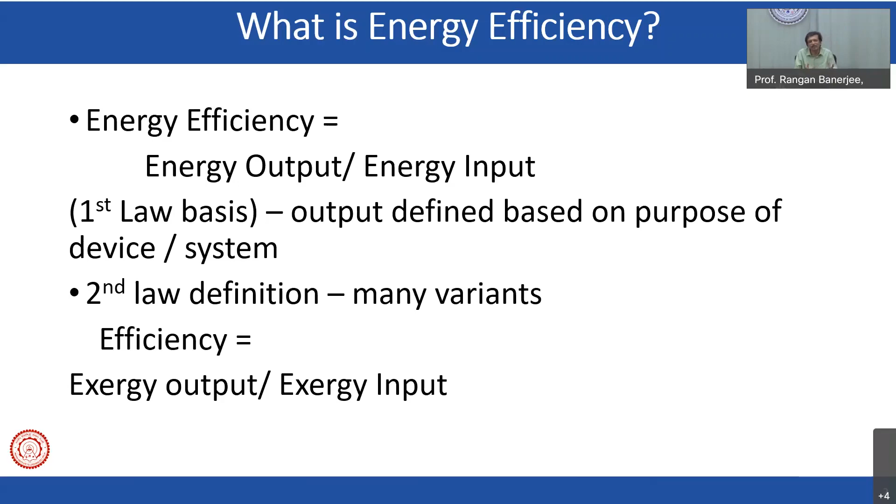So just to give you one of the first practical examples—this is way back, we're talking of the steam engine and the first efficiency measurements, around the 1800s. This is from a paper, and we'll give you the reference. It looks at the water being expelled from the engine, the total output coming out, and this was used to define an efficiency and to compare different kinds of designs.

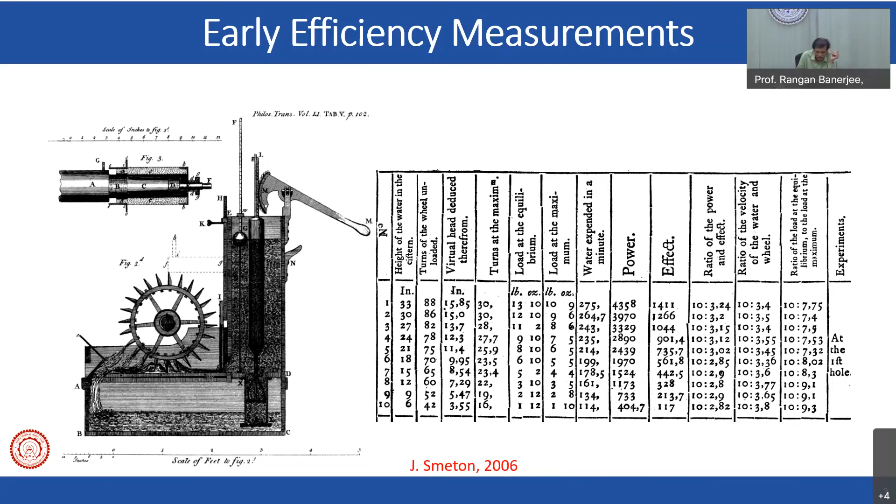We also had an energy service company—the first concept of the energy service company was actually established way back by James Watt. James Watt was a very nice innovator, but he was also a very good businessman. He started off saying, we will leave you a steam engine free of charge. This was a time when you were competing against horses, since earlier it was horsepower we talked of. He said, we will install these and take over the operation for 5 years as customer service. We will guarantee that the coal for the machine costs less than you spend as fodder on the horses that do the same amount of work—for lifting water and everything you require—and you give us a third of the money you save. It's very interesting. He also had certain patents, and there was this Watt and Boulton partnership. So this shows that the energy service concept, the ESCO concept, is also not really new—it started off initially this way.

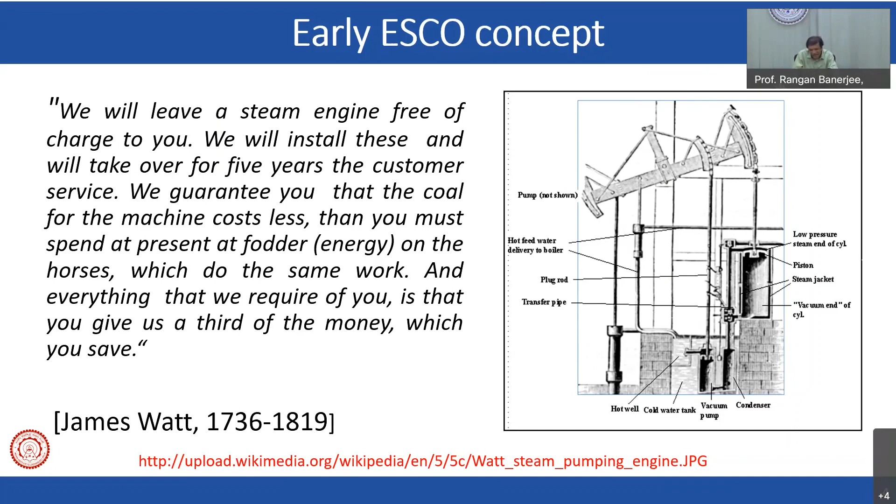Now here's something you may want to think about, something I'm sure all of you have heard as slogans: is a unit of energy saved equal to a unit of energy generated, or is a unit of energy saved more than a unit of energy generated, or less than a unit of energy generated?

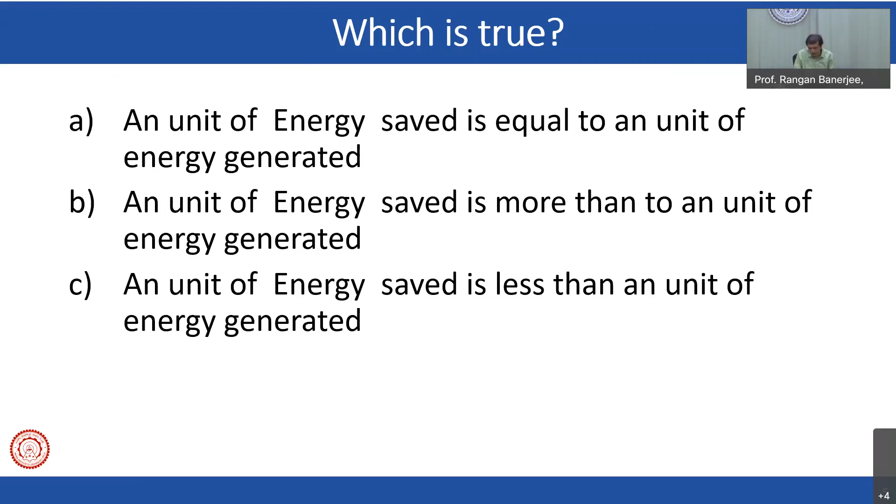Now, most of the energy professionals on this platform will say that it is usually more than a unit of energy generated, and I'll explain why. And then this is something that all of us have seen. Basically, whenever we talk about energy, today what you're seeing is in your rooms which are air conditioned, or in the display that we are seeing, there is finally an illumination, there's a comfort, there is a final end use that we are looking at, the end use activity.

But in order to have that end use activity, we are using the energy that is available in nature. That primary energy earlier used to be mainly fossil, coal, oil, natural gas, and now we are talking of solar, we are talking of wind. This primary energy in the form that it's available in nature is not really directly useful to us. So it goes through a sequence of conversion steps. So in case of coal, you mine it, you wash it, you put it into a power plant facility, you generate electricity, you have the secondary energy.

That secondary energy goes through a transmission and distribution system. You have the final energy that you buy in your CII center. If you're buying it from some discom, you then use it within your building to run your air conditioning system, or you use it for your compressed air, so you get the useful energy which gives you the end use service.

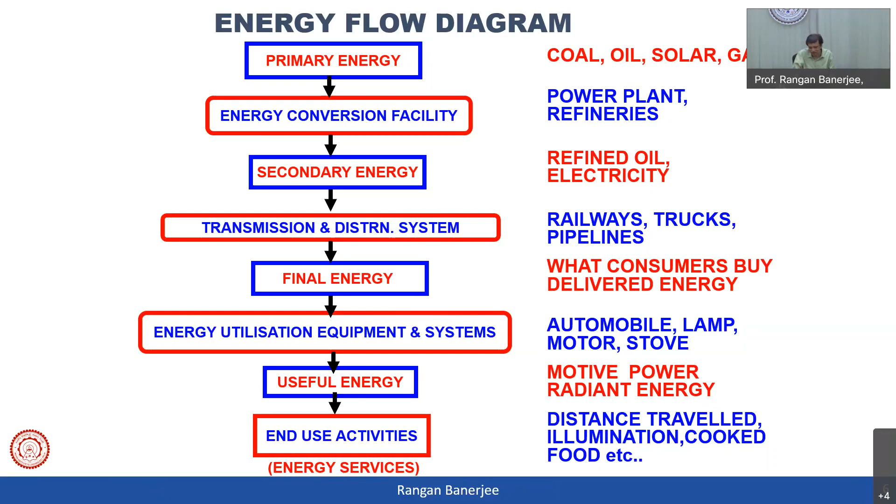Now, in each of these conversion steps that we have, some part of the energy that we are taking is used up, because these are all finite, these are all actual processes, so there will be irreversibilities, there will be losses. So when we need 1 unit of useful energy, depending on the system, we may need 2 units or 3 units of primary energy. So naturally what we say is 1 unit of energy saved is usually much more than 1 unit of energy generated. So this is one of the things that we need to keep in mind, and we need to look at the entire chain. And I'm sure this is something most of you are familiar with.

Now, this is another question which I think energy professionals all have a straight answer to. We say, yes, of course it results in energy savings, but economists have a different opinion on it. So the question is, does energy efficiency always result in energy savings? Okay. And in order to look at that, again, just think of a thought exercise. Suppose you use a car and you drive 3,000 kilometers annually in a car, which gives you an average fuel economy of, let's say, 15 kilometers per liter with a particular constant price of petrol. Now it's talking of 90 or 100 rupees per liter. You can say annually, this is how much I'll spend.

If your car is made more efficient with some retrofit, so the fuel economy is now 20 kilometers per liter, how much would you save? The simple engineering way of calculating this is we just calculate so many kilometers divided by the kilometers per liter, you get so many liters, multiply that by the price, and you get the annual amount of energy and cost, and when we have 20 kilometers per liter, we'll have relatively less, and accordingly we get this is the amount of cost saving.

But actually, if you see, and this is something you see in many of the vehicle ads, this is so efficient that you drive more, because you know that you have a more efficient car, right? So this is, in a simple way, what is called the rebound effect. And in the most extreme case, if the rebound is so much, it might actually backfire where you use more energy, and there are, of course, examples of this, but the answer for energy efficiency professionals is, in general, the rebound effect is relatively small. Again, very few studies in the Indian context.

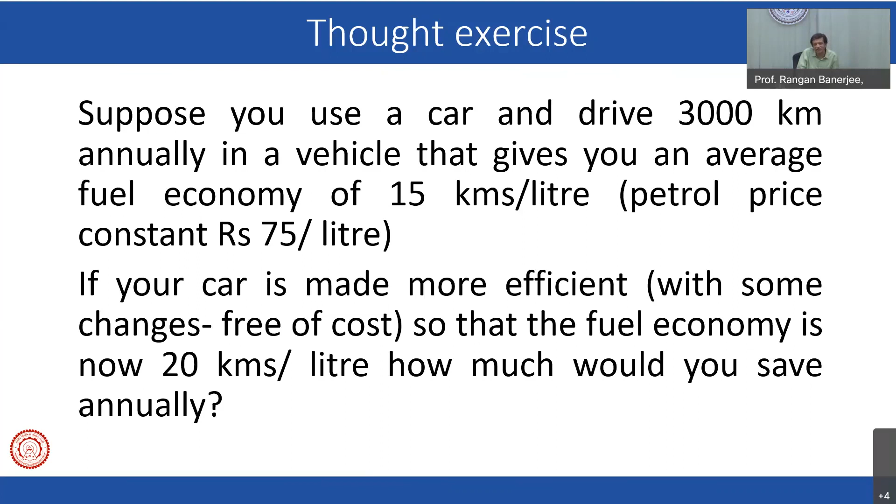And again, in this case also, there is a historical case. So way back in 1866, William Jevons had said it is wholly a confusion of ideas to suppose that the economical use of fuel is equivalent to a diminished consumption. The very contrary is the truth. And he basically said that the more we start making coal efficient, the more uses you get for coal, and so the consumption of coal at the national level actually starts increasing, and that's actually what happened.

So this is the kind of rebound, and this is from, you can see the paper, so he talks about coal being used in the blast furnace, but then you start having more and more steel and pig iron being used, so that becomes more.

So this is the kind of thing, and there's an interesting article in the New Yorker, which is called the Jevons paradox, which basically says that you can see that on your cell phone. Cell phones, we have made them more efficient, but then you start using more things from the cell phone. So the overall battery size and the energy consumption, even though the thing is more efficient, over a period of time you start getting more usage. So this is the kind of paradox.

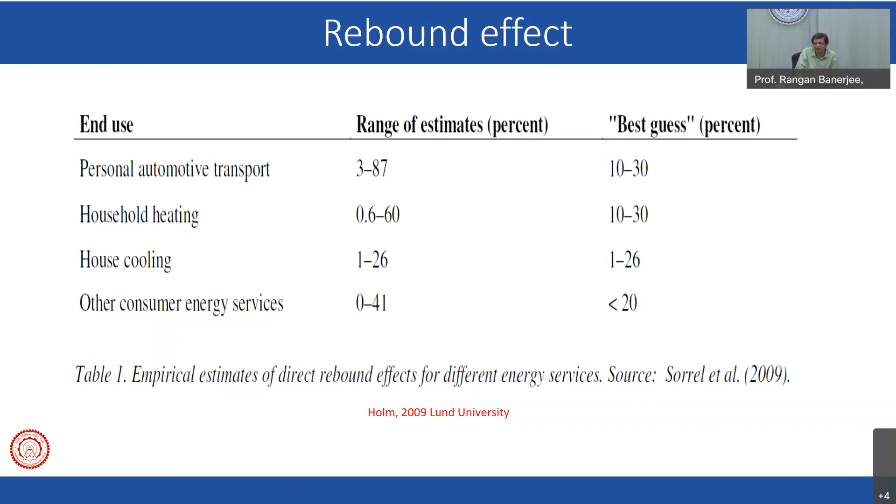But typically, globally, these rebound effects are usually small. All less than 100%, basically 10 to 30%. And so we do have energy efficiency. And this is something where we need to have more studies on direct rebound, indirect, economy-wide, and we can calculate this. So this was one classic example of a rebound.

In the UK, this is an old example, well documented. A supermarket chain actually provided an incentive that if you bought compact fluorescents instead of incandescents, you would get air miles. And it turned out that with the number of air miles, if you did the calculations, you are actually increasing your total CO2 impact. But this is just to show you some of the things which are there. So these are direct, indirect.

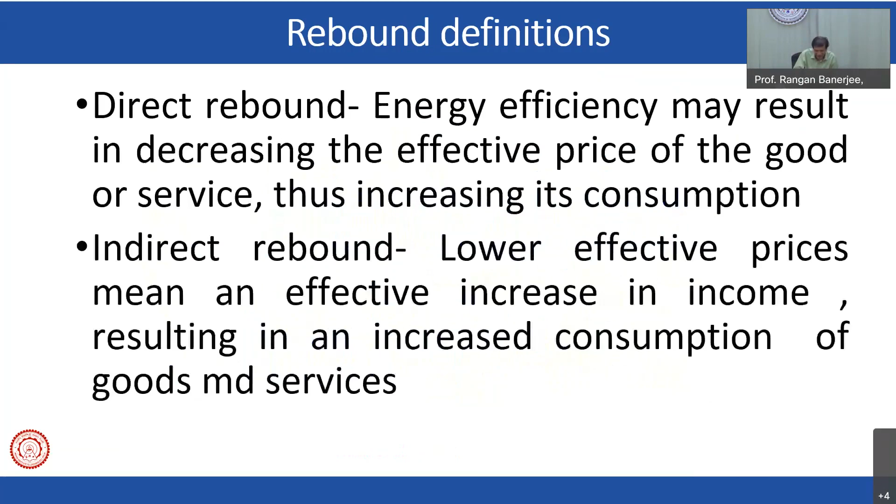Now the other thing you may want to see: one of the things driving our total energy sector and energy efficiency is this whole issue of climate change. And as you know, our Prime Minister in Glasgow has made a commitment that by 2070 we are going to go to net zero. Now, if you look at a particular year, say compared to 2020, we want to go to 2030 and see the total annual CO2 reduction that we want to have, and then see all the options and rate them with a marginal abatement curve.

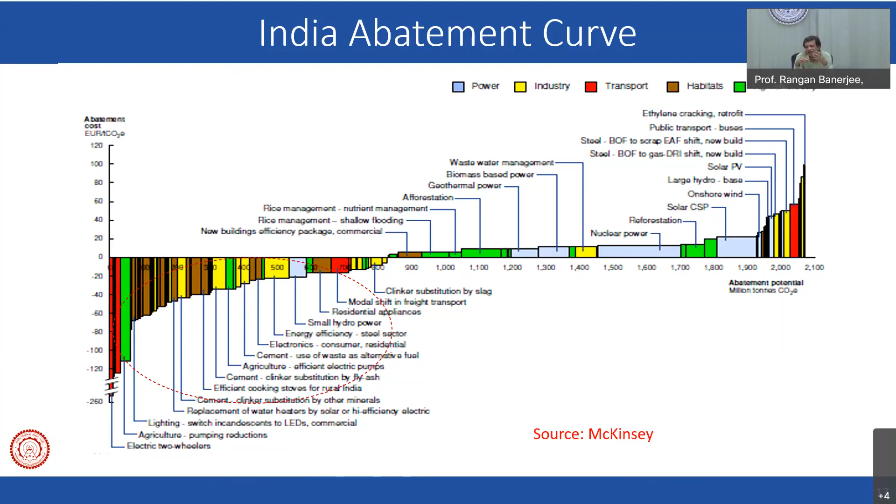So on the y-axis we have the cost per ton of CO2, and on the x-axis the million tons of CO2 that we are saving. This is one of the McKinsey curves which was done for India. You will find that there are a number of things for which the cost of abatement is negative, because they are anyway cost effective, and almost all of those are energy efficiency. So energy efficiency makes a lot of business sense, even if you don't count the carbon. Of course, there are barriers, but it just makes sense.

So let me now take you through a few examples. The classical way to do this is to do an energy audit of an industry. This term got coined after the oil shocks in the 1970s. Typically, you go through a structured audit: identify, measure, do mass and energy balances, list out all your energy conservation opportunities, prioritize them in terms of their cost-benefit ratios, then install the measures, do a post-audit and see.

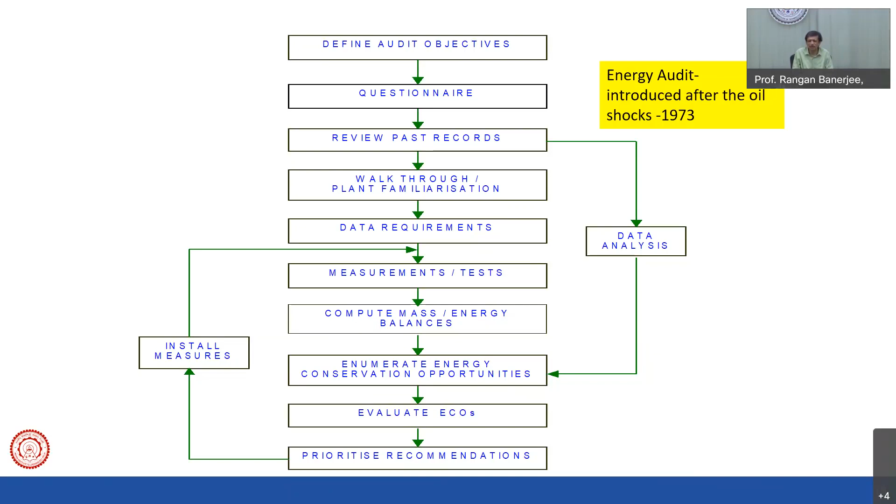So we have many types of energy conservation opportunities, and most of these are at the design stage, where we can do efficient process design, efficient equipment design and selection, and design the utility system for the process. Once you have it, we can do an energy audit, change the operating strategies, and retrofit the equipment. For instance, where flue gases are going out, I can put a waste heat recovery device, or if I have a pump that you're controlling by throttling, you can put a variable speed drive. These are all standard things. And if your equipment or process is inefficient, we can actually replace it. So that's the other.

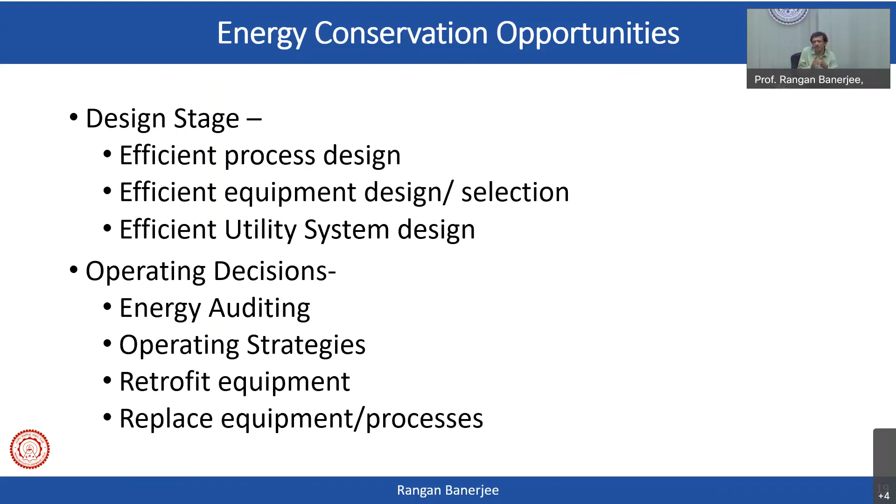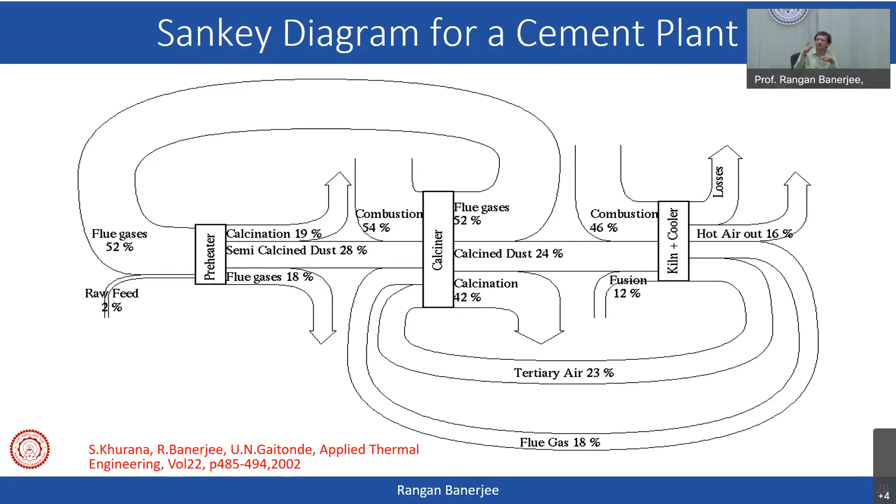So when you do an audit, now this was one, it's an old paper, but it's an actual audit of a cement factory in UP where you can see, when this is a Sankey or an energy balance diagram, you can see in the cement that there are already some inbuilt loops where we are recovering some of the energy in different sectors.

In all these cases, what we do often is we do benchmarking, and I think with the PAT, which is now prevalent in our country, we are monitoring the specific energy consumption. So typically, what happens is we take the entire set of, let's say, cement plants or steel plants or aluminum plants, and we can then see what is the specific energy consumption, and we arrange them from the most efficient to the least efficient, and then we put the top 10%, and that becomes sort of a best practice plant, or that's the target, and then we can see.

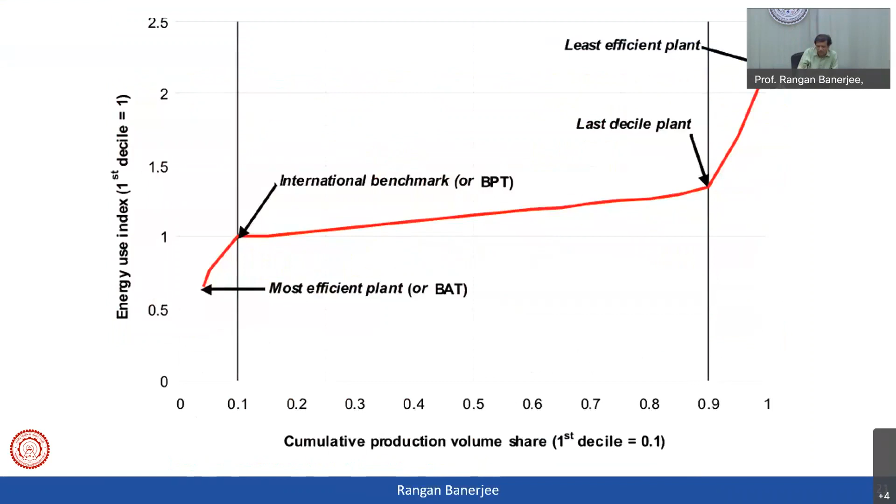So in the Indian context, for most of the places, we see that we have a lot of very efficient plants competing with plants which are actually at the tail end, and so this is one of the things. The other thing which has happened is we now have a voluntary international standard for monitoring and looking at energy management within an industrial context.

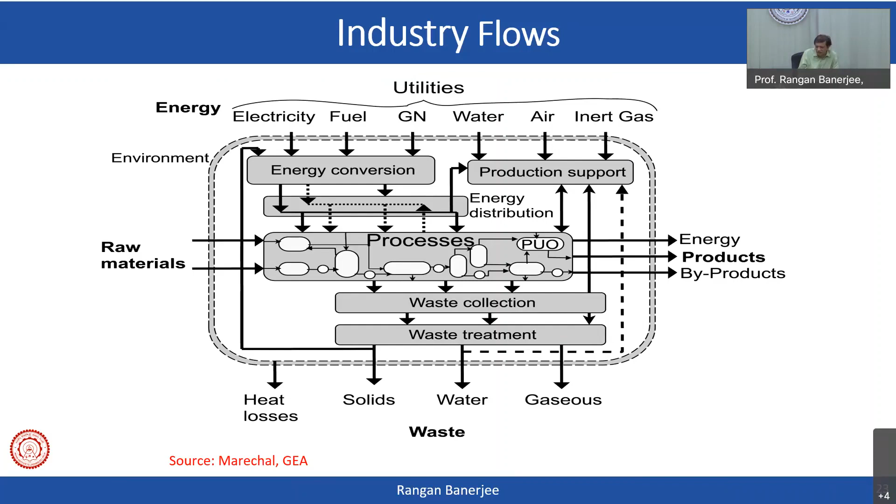When we talk about industrial context, every industry starts with raw materials and creates products, and in the process we are using the utilities, and we want to see: can we minimize the use of these utilities so that we use the things internally? This is where we can use pinch and process integration, so that we minimize the amount of waste and the amount of utility. This is a very well-defined area where there is a lot of research. There are lots of commercial organizations also in this space.

Now, often all of us in the energy efficiency domain feel that we are already done. We benchmark ourselves with others, and we say we are the best plant in the country, and maybe even the best in the world. So the question is, are we reaching our limits to energy efficiency?

And to do this, something I was involved in was the Global Energy Assessment. This actually came out in 2012. It's a book by the Cambridge University Press, but you can see chapter 8. The chapter is freely available online. And you will see we did this, Marechal of Switzerland did this for us.

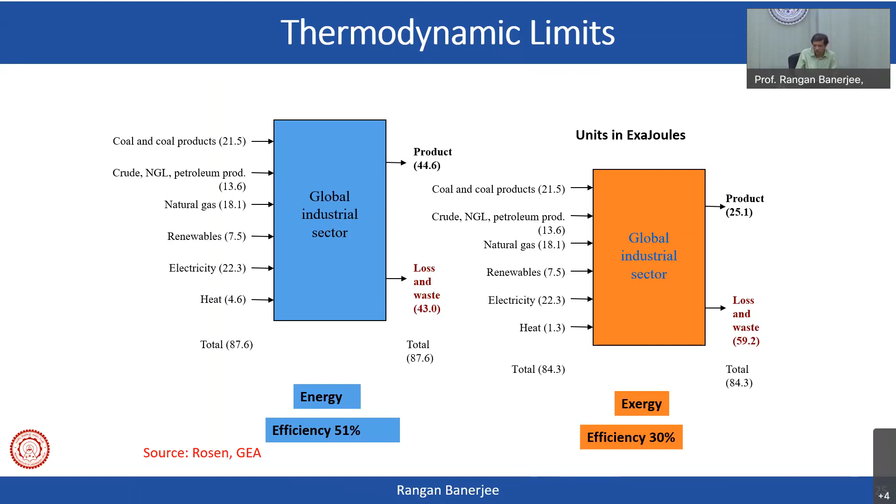What we did is we took the entire world's industrial processes and we tried to do a first law and second law efficiency. And we found that the second law efficiency of the industrial sector is just 30%, while the first law is about 50%, which means that many of our processes can be revamped so that they become much more efficient thermodynamically. Is this going to happen automatically? No, because in all the competing industries, significant investments are required. But technically, it is very much possible to make these modifications.

The other thing that we did, and this is one of our PhD students who had done this work: when you create a model, you talk about it theoretically. But at the other end, you do an audit and you see what is happening in the industry. We coupled these. We said, okay, let us look at any industry which exists and let's create a model for that particular set of equipment with that process. And we developed this hands-on.

We then built up a set of models, mass and energy flows, and then we validated that model with the data. And then we use that model to see what-ifs and how we can change parameters in that industrial context to actually reduce the energy consumption.

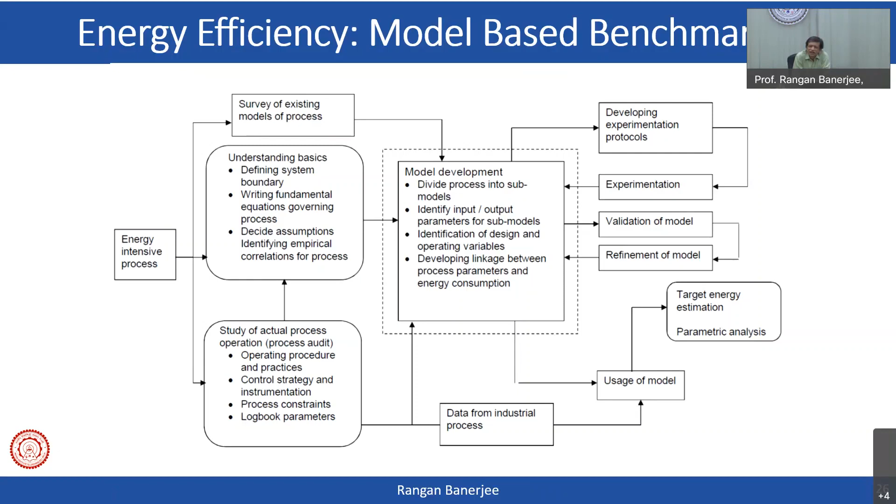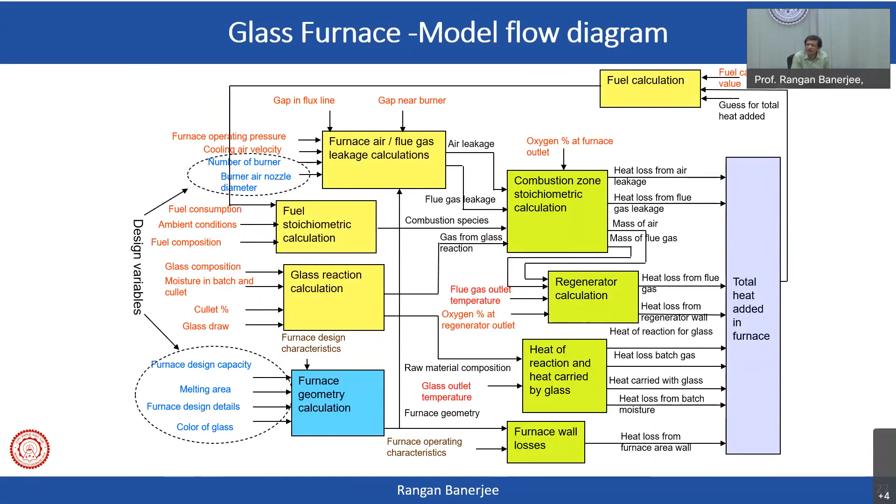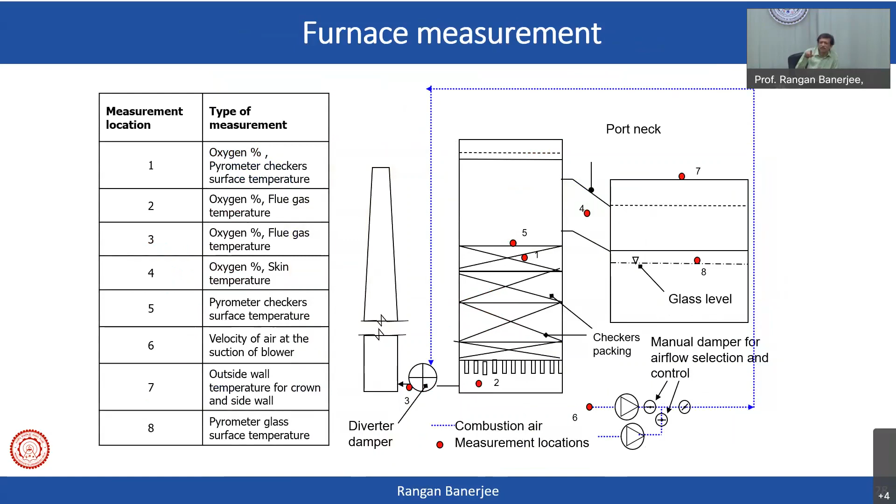So we did this for the glass furnace, and making glass is actually a very energy intensive industry. We looked at the airflows, the stoichiometry of the fuel, the glass reaction, furnace geometry, and then the regenerator combustion zone, and then there was a loop. This was a set of models, and then we validated it with a number of glass furnaces and took data from sensors, temperature, composition, etc. Then we built a tool which you could use to get the specific energy consumption, the Sankey diagram and the different losses.

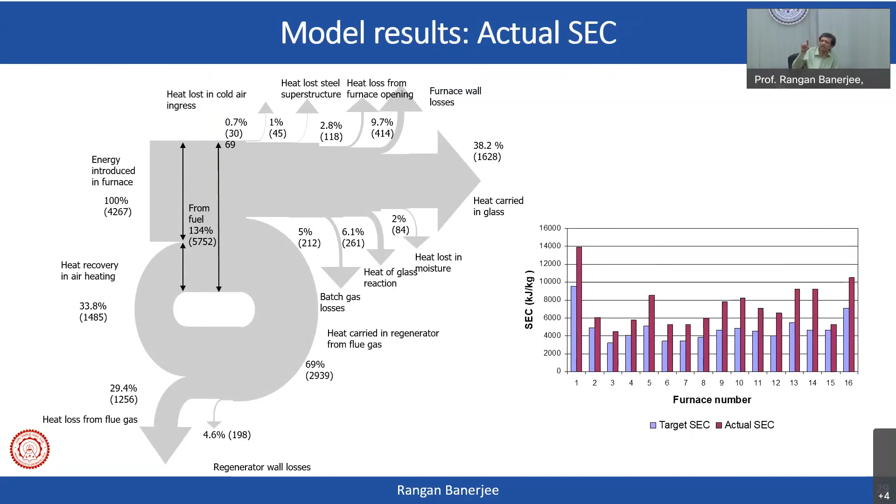And then we had an ideal and an actual, and we had a workshop with a set of glass industries. Each one put their own data, and then you can see the bars where the lower value is the model, the ideal, what can be achieved with that plant, and what was actually there. So this was a scheme for model-based benchmarking.

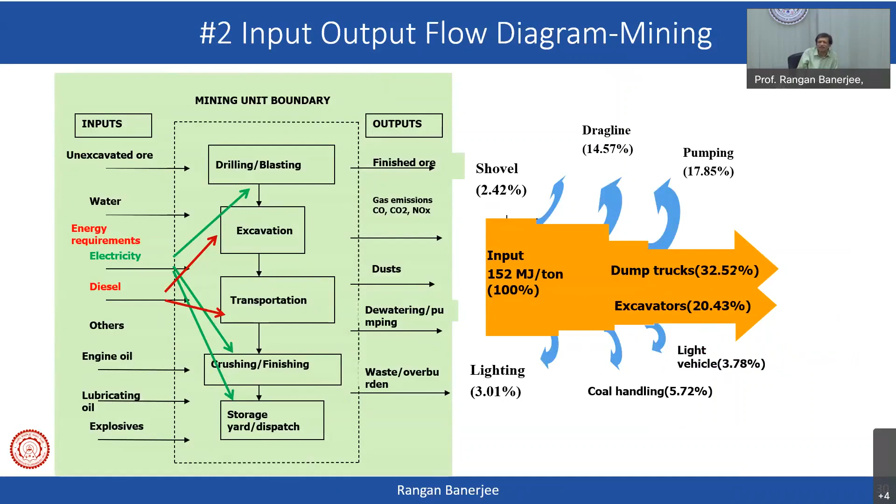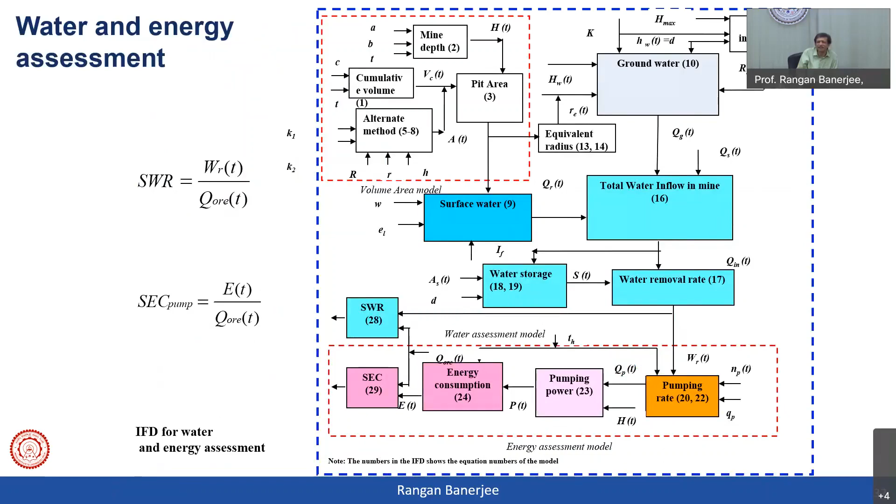We also did this for mining, with dump trucks and excavators. We also looked at a mine transport model. We did mine water and energy management assessment in mines, and again created a model. So what I wanted to say is it is possible to look at the existing structure and the process, create models, and then see how we can do model-based benchmarking to go beyond what exists today.

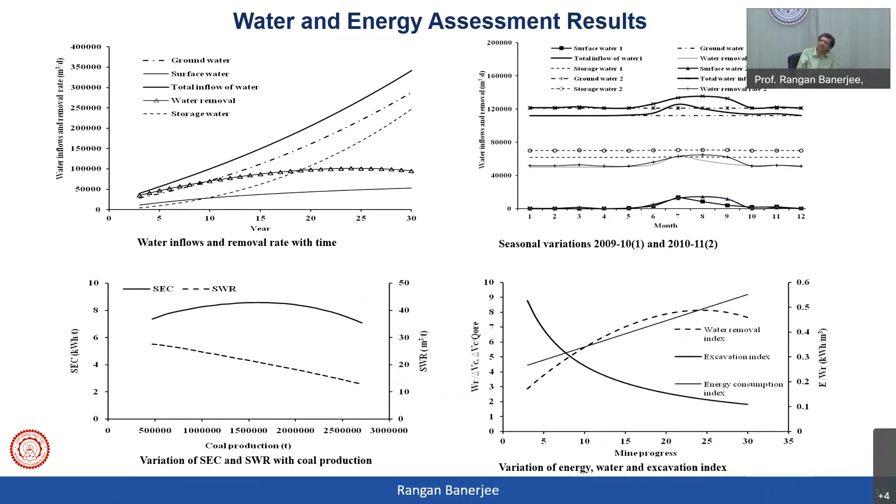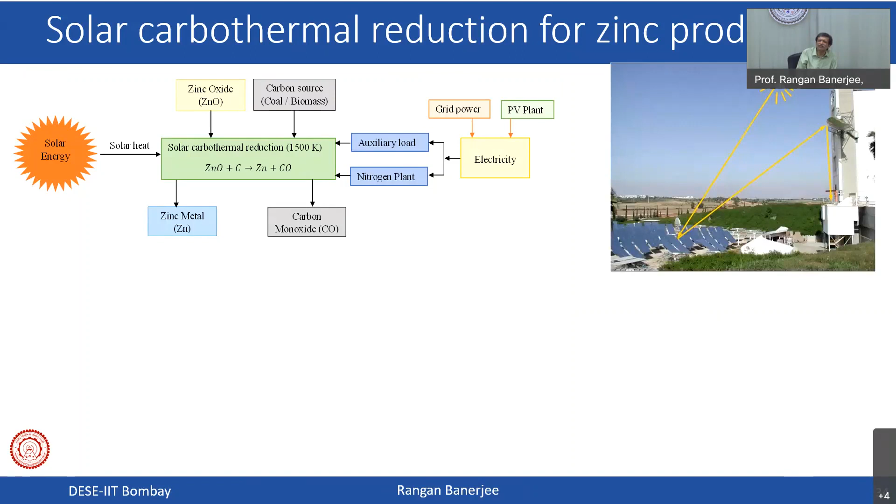And this is one step beyond the audit, but it is now going to process modification, and process modification at the design stage you can also do. The other thing that we want to see, and I'll come back to this at the end, is that in many industrial processes, we can reform the process to actually make it a zero carbon process, even a high temperature process like carbothermal reduction for zinc production.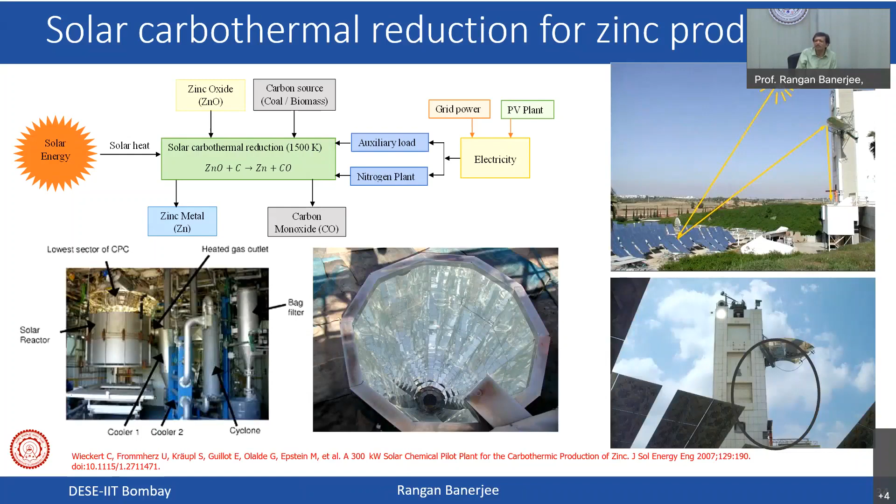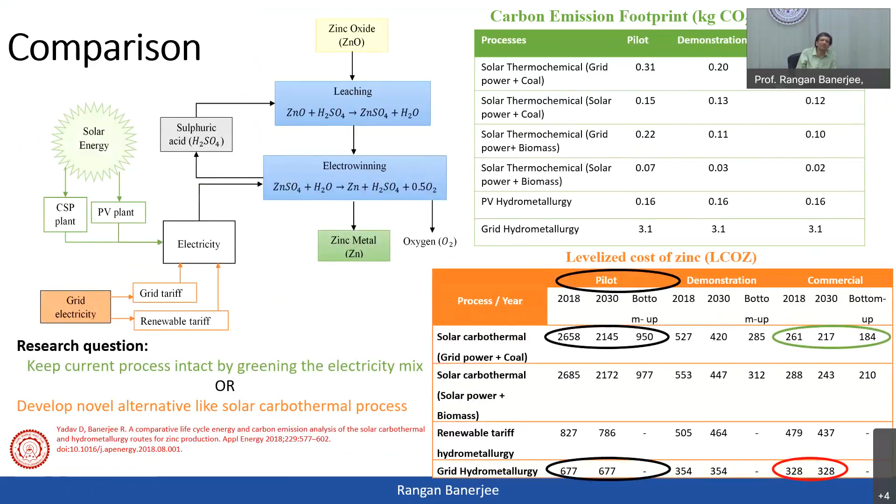That can be done with solar carbothermal. There's a 300 kilowatt solar chemical plant, and we used this data and created an assessment of a fully functional method using solar for zero carbon zinc production. Again, this is currently high cost, but it is something that can be done. Similar things you can look at for steel and cement, and this is just to illustrate that we are nowhere near the bounds of where we are going.

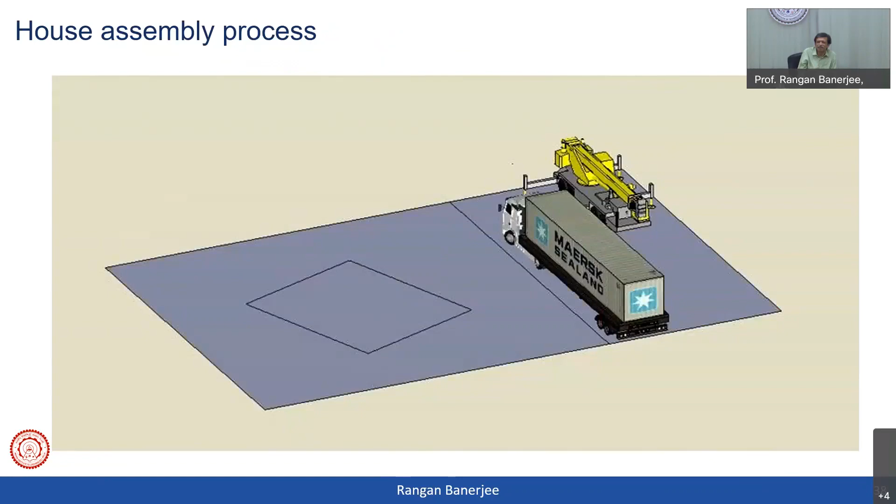Now, let me give you some examples in buildings. This is a student team, an enthusiastic set of people who built a fully functional solar house, 5 kilowatt of PV on top, some solar thermal on top, insulation, and we built this house in Versailles in France. We were the first team to compete in the Solar Decathlon Europe. We rebuilt this house on the IIT Bombay campus, and these are some of the images from that building, and this is the way it's insulated.

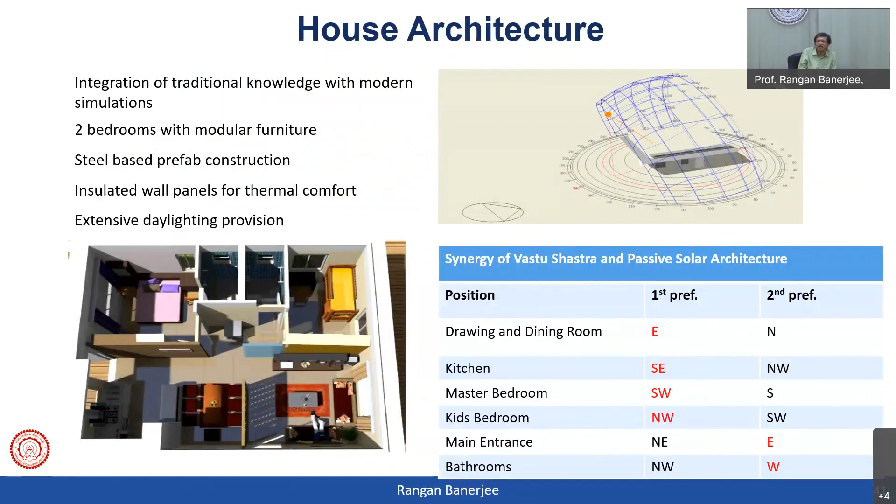So typically we simulated and reduced the energy footprint of the building, and then we put PV on top. We did building simulations. We also looked at the views and the illumination, and you can see the initial base case, and then with adaptive control and ventilation, double glazed windows, overhangs, insulation, and energy efficient AC, we significantly reduced the kilowatt hour per meter squared per year.

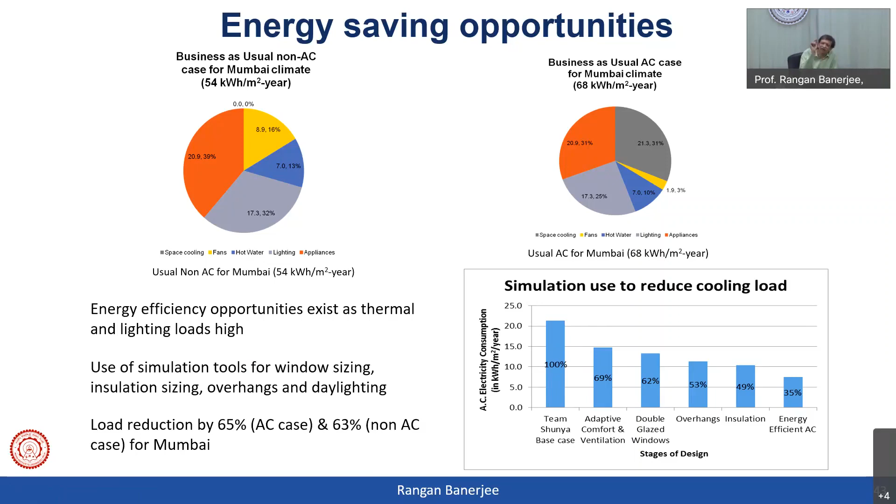And then we put PV on top, and during the days of the competition, on the actual performance of the building, we got the highest net energy supplied, because we had done single axis tracking optimized for that location in France. So you can see the actual performance of building input energy and building output energy. Anyway, these slides I will share with you.

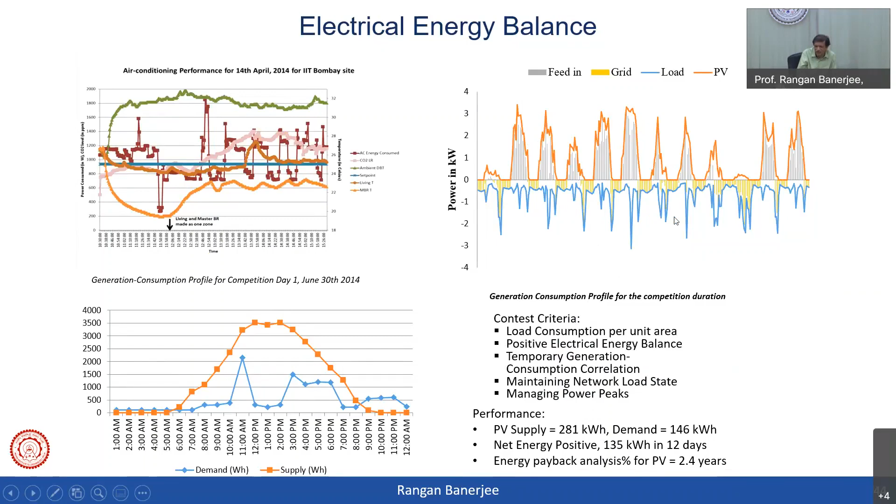Another PhD student worked on this: when we design and simulate a building, there are a large number of parameters that we choose. So we thought we can use a method from the design of experiments to reduce that and create a simple modified model for the building, so that you don't have to simulate the entire building, and use that to create an optimization to either minimize the cost or improve the energy performance.

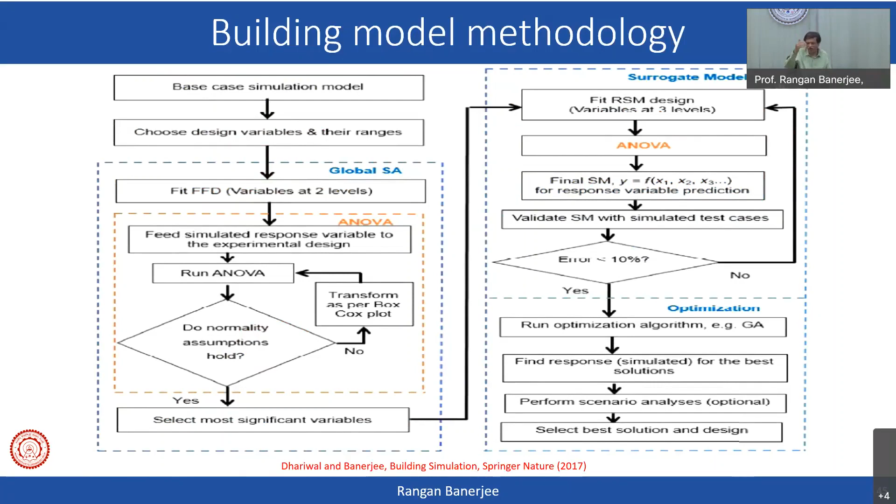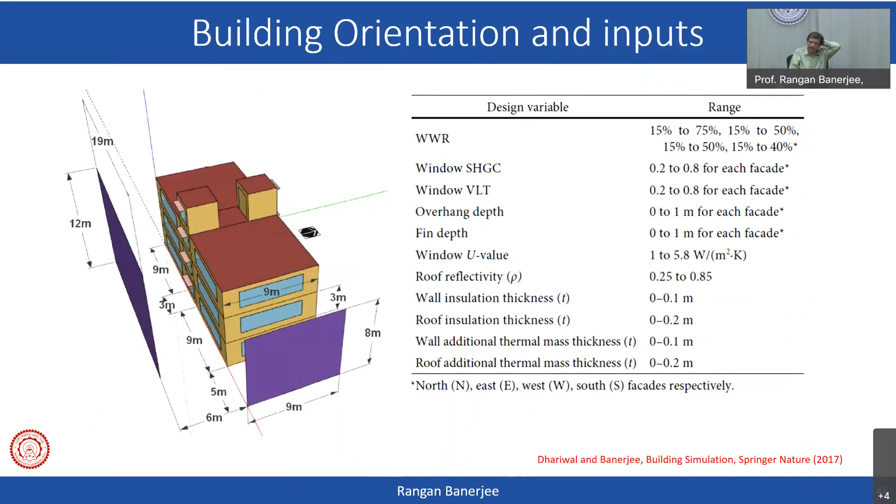This is what we tried to do with a series of choices, like window to wall ratio and overhang depth. There were a whole host of choices for a 3-story building. And then we developed some correlations, optimized it, and got the final result.

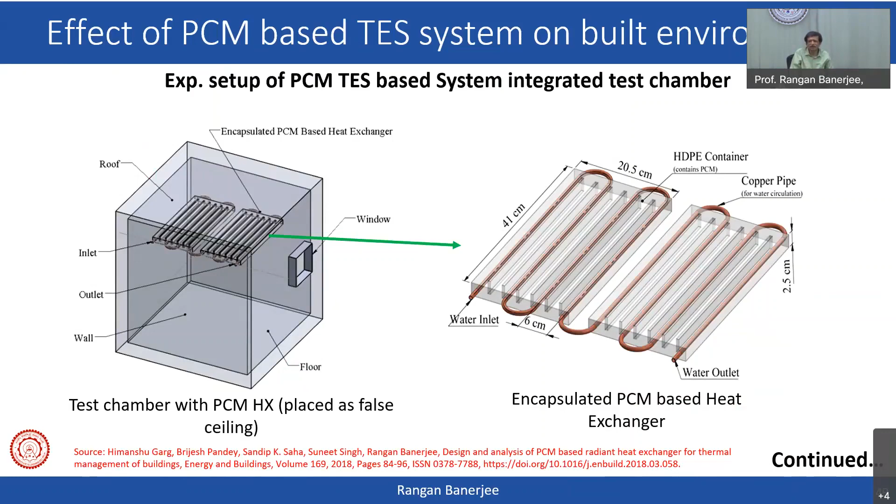Another thing which will be useful in buildings is the use of phase change materials. We had done a small exercise looking at phase change materials in buildings and saw their impact on the built environment, so that the requirement for AC actually reduced. We also have been doing mixed mode studies.

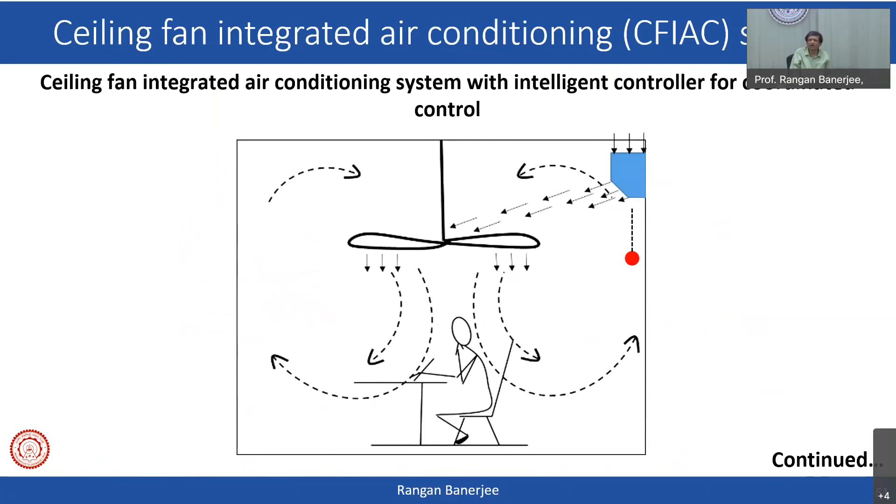So there was a PhD student who just finished, where we looked at ceiling fan integrated air conditioning, and then the set point can change, and the control can be done. We also looked at predictive modeling for this.

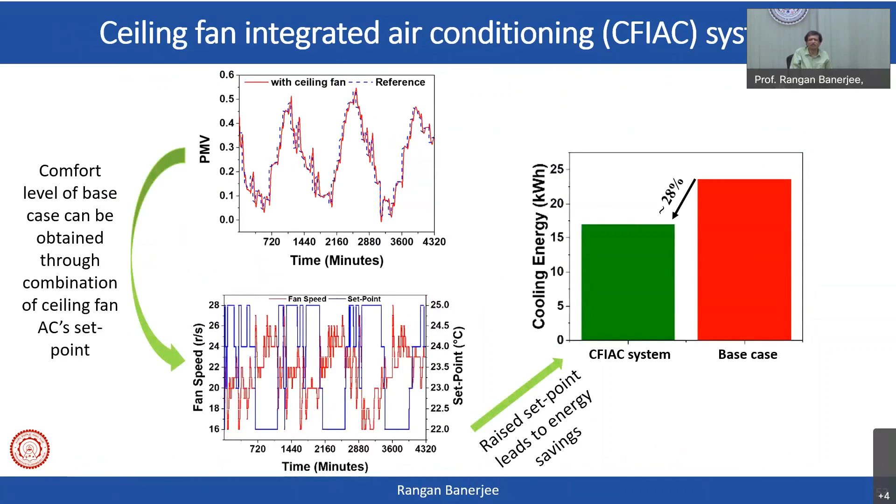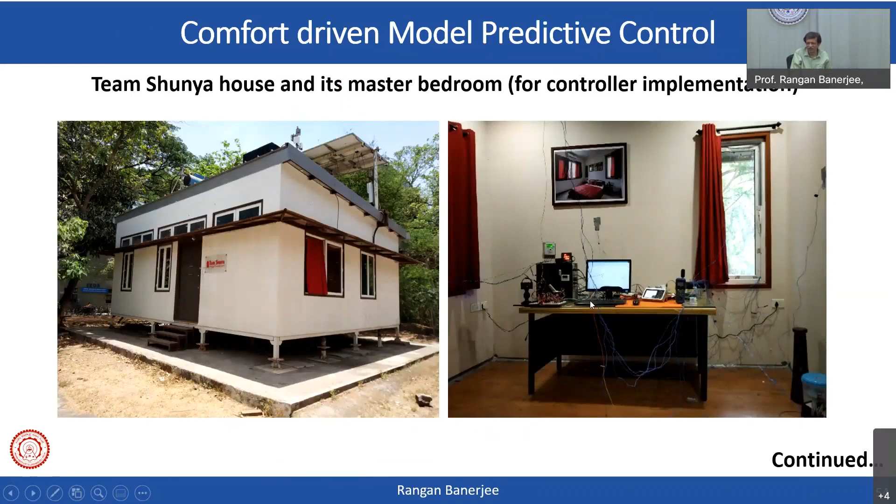So we tried this out again in that Team Shunya house. Of course, you can see that you have wires and other controllers which have been put over here. But basically what happens in this is we have done a real-time simulation with hardware in the loop, where we are looking at external air temperature, we're looking at the PMV, and we're looking at this.

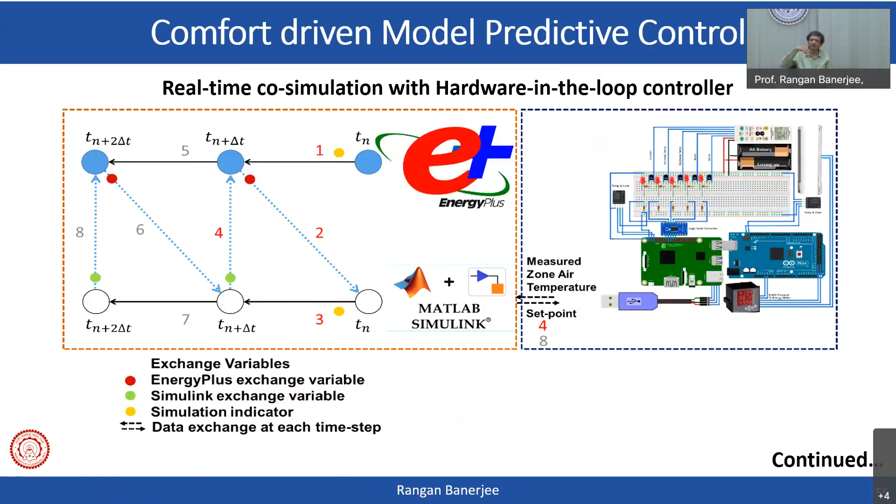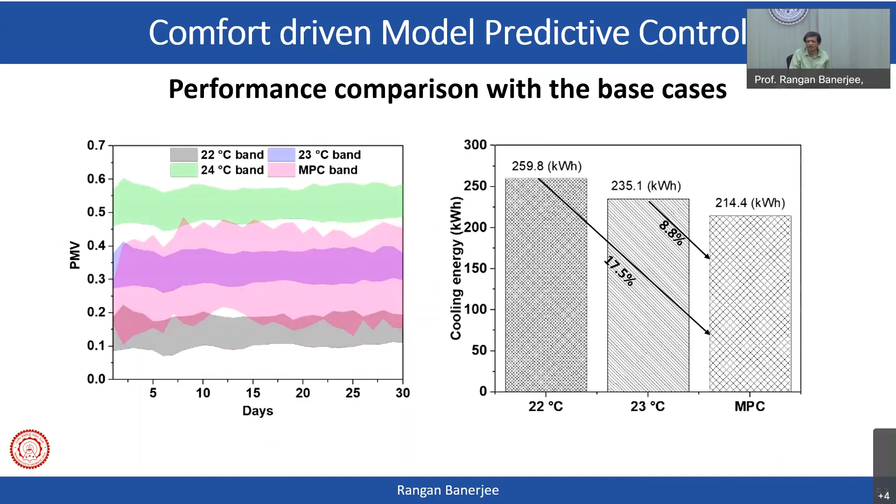And so this is again something where we have comfort-driven model predictive control based on this. And we saw that we could get a significant amount, about 18% savings as compared to normal air conditioning. And again, the airflow and then this.

So now, just to come back to the last few things which I wanted to talk about. The question is, does the energy efficiency metric remain relevant? And what is the reason for asking that?

See, the initial energy system which we were talking of is for coal, oil, natural gas. All of these were stocks. And now what we are talking of is we have converted that into flows. So we are talking of solar energy, wind. Now that energy source itself is not too much constrained. So that is not a critical source in that sense. The scarcity of that is not much.

There is a scarcity in terms of the capital cost, and you're looking at PV modules and other things. So the cost may become a metric. The other metrics which will be important are sustainability related metrics, which are water, emissions, land, and cost. As I said, renewable energy may not—the source itself may not be constrained.

We may also want to look at all the materials that we are using and look at embodied energy, embodied carbon. We may look at the entire life cycle, and that should be the energy payback period—not just the payback period of the cost, but also the energy payback period. And then there may be additional indices, I could indicate some of those.

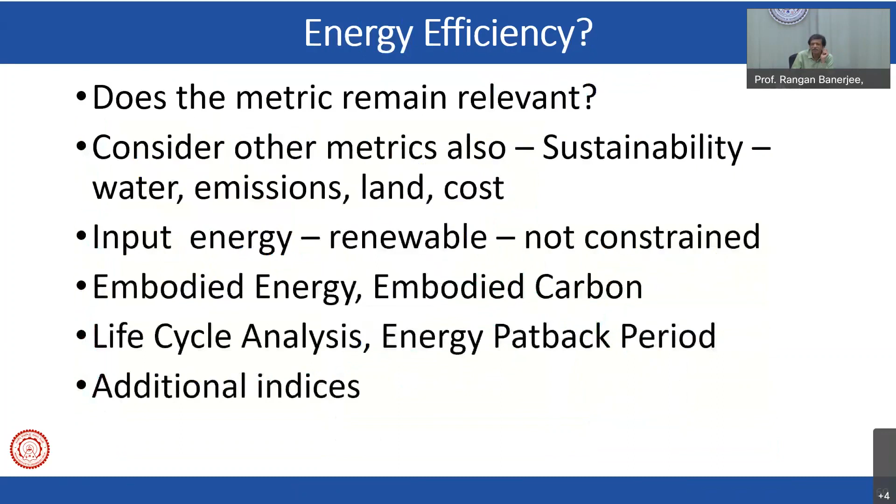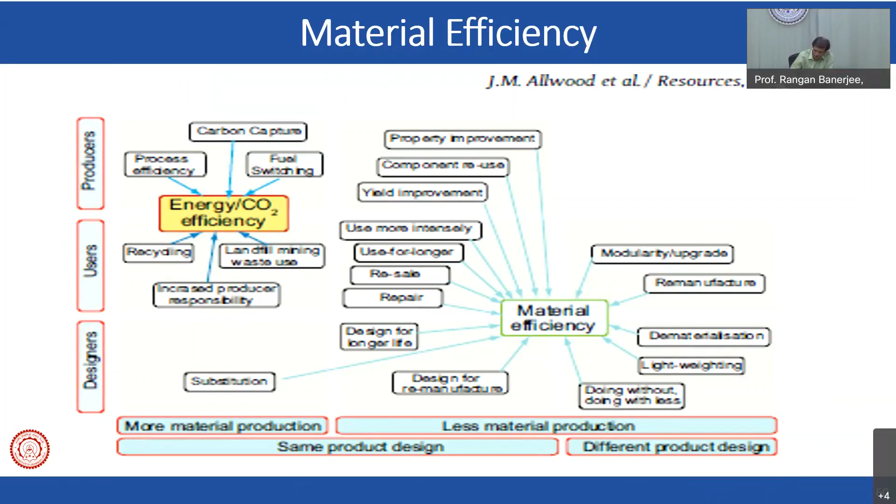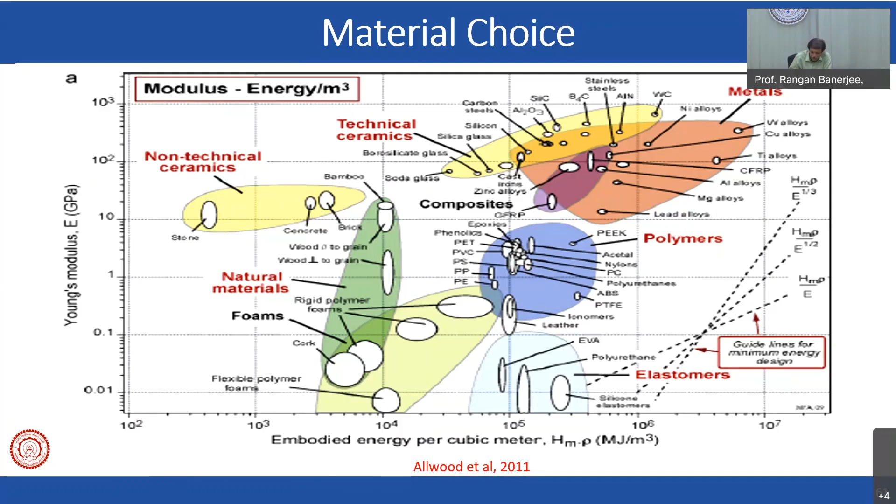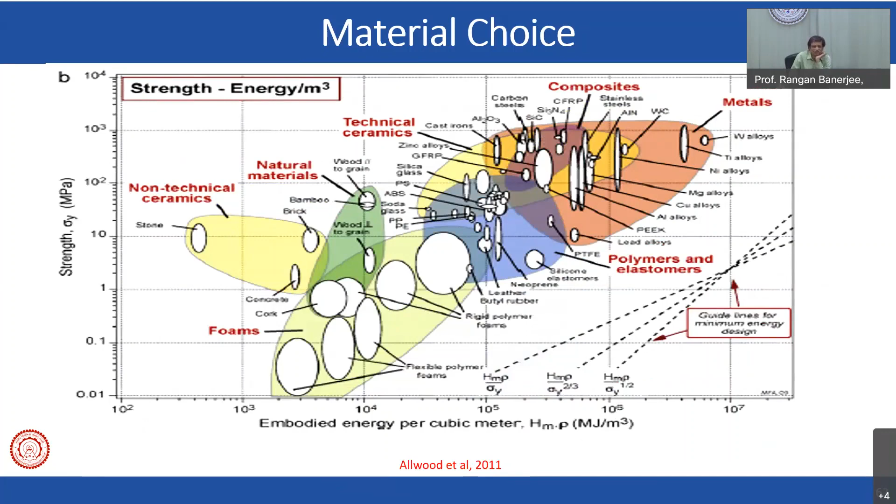So this is sort of my last slide, and I'll spend a little bit of time on this and then open it up for questions.

So the first thing is, we must do benchmarking, and we must also look at sharing best practices. I think in industry we do compete, but in addition to competition, we must also collaborate, because often even within the segment that you are in, if we look at best practices, you may actually survive in the market for a longer period.

Another issue which is very clearly understood now is that often there's no level playing field for efficiency, and the savings that we get come out of somewhere else. This is very classically true for many of our institutions—like, for instance, the government, or let's say an IIT or a public sector. Often you have different budgets, and the capital budget and the operating budget are different. There are also a lot of co-benefits, and sometimes what happens is, because we do efficiency, we are able to improve the throughput, and that might make more of an economic case than the efficiency itself.

One of the things which we have not looked at to the extent we should is dematerialization and redesign of products. You will see in Germany and in many of these Scandinavian and European countries this whole eco-design concept. We can redesign the product.

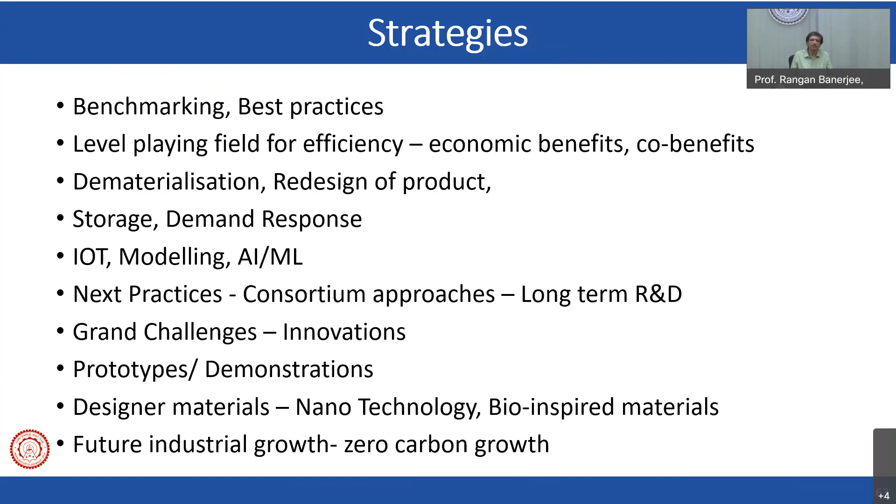I'll be happy to try to answer any questions that people may have. With this, I think I'm sort of at the end of my time.

Thank you. Thanks a lot, Professor Banerjee. Thank you so much for your address. I think you covered, from the definition of efficiency to the rebound effect to the energy conservation opportunities. Also questioned the limits on energy efficiency, spoke about benchmarking, modeling, mapping, but I think you beautifully summarized on the strategies here. You looked at 10 key strategies as far as the next steps are concerned.

There are quite a few questions which have come up, Professor Banerjee. I'll try to kind of group them together and pose them to you to seek your responses. The first question was on the rebound effect that you spoke about. Similar to the examples that you spoke about, Professor Banerjee, the question is, with the increased generation of energy from renewables, and do you see the cost coming down, and do you also see a scenario where the energy consumption might actually increase over a period of time because of more renewables coming into the energy mix?

Any views on that? Yeah, so I think when we come up with the energy system, it's not just the cost. If you're talking of electricity, it's an overall system cost that we are talking of. So if you look at it, we have not really seen the energy costs coming down significantly.